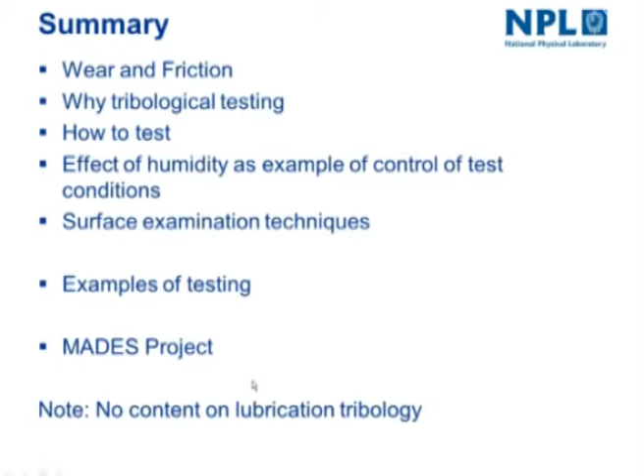Wear is a major and ubiquitous source of losses to commerce and society, and it affects most industrial sectors. I've just picked out a few: transport, mineral extraction, and manufacturing.

Friction needs to be controlled, but is not necessarily a bad thing. Indeed, wear is not necessarily a bad thing either. If you actually want to machine materials, then you want controlled wear. But friction in particular—if you didn't have brakes, if you didn't have good high friction soles on your feet, we'd all be in a bit of trouble.

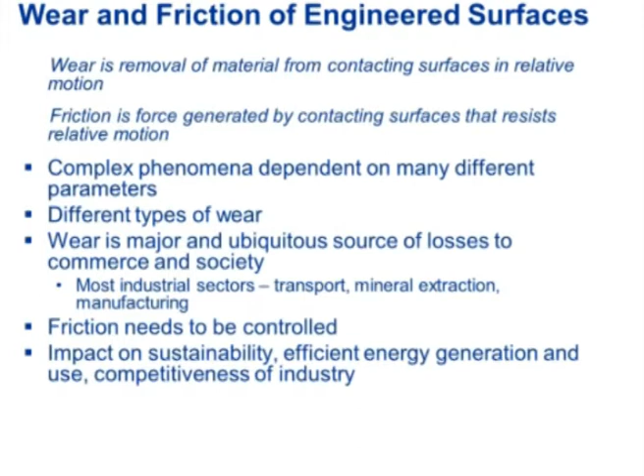Both friction and wear have impact on sustainability, efficient energy generation and use, and competitiveness of industry.

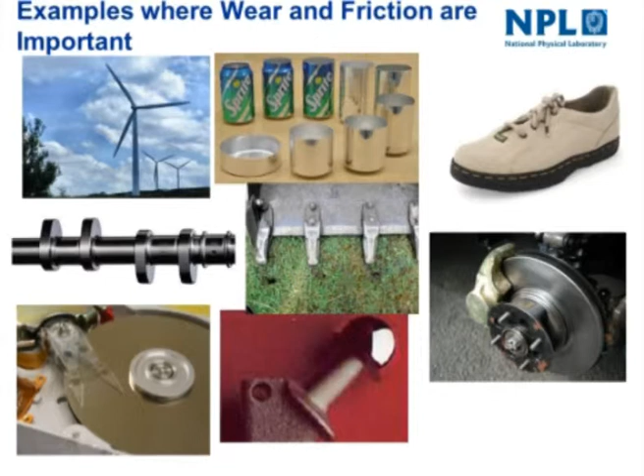Moving on, adhesive wear. This is where you get one nominally flat surface moving over another. One of the important things to realize is that even though you think it's flat, it's not really flat, and typically between two surfaces you get 4 or 5 different points that are carrying most of the load. At those points you can get phenomena like welding of the asperities together, and then you get removal of material and wear processes that take place.

Fretting comes from small oscillatory movement between relatively smooth surfaces, but the emphasis on this one is that it's small motion.

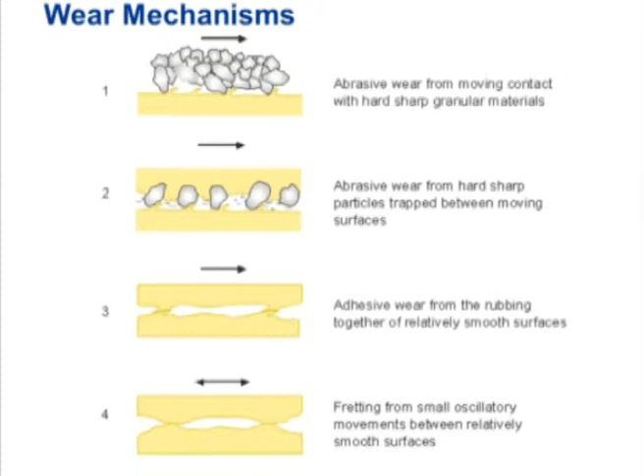Cavitation erosion is when you get collapse of vacuum vapor particles, bubbles in a fluid, and the stress waves that are generated through that cause damage to the materials that lie underneath. It can be quite severe actually—you would think that bubbles don't create much damage, but they can do. A typical well-known example of this is propeller blades for ships.

Particulate erosion is also critical, and this is where you get hard particles in the stream of fluid hitting a surface and causing damage to the surface.

I just wanted to go through those because one of the critical elements in carrying out wear testing, and even having a hope of generating good data, is to recognize the mechanisms that you have.

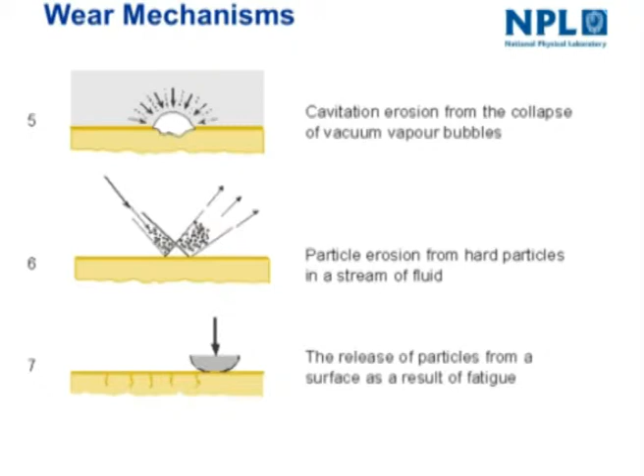So why do we want to carry out wear testing? There are several drivers here. One of the main ones is we want to reduce losses from wear. We want more efficient and more capable machines. We want more sustainable use of materials, and we want more competitive manufacturing.

You can go from that all the way through this sequence of examples to laboratory tests, and laboratory tests are much better controlled. They are cheaper normally, and they are less complex. But the big question is, do they really simulate what you want in the field? And that is a very big question.

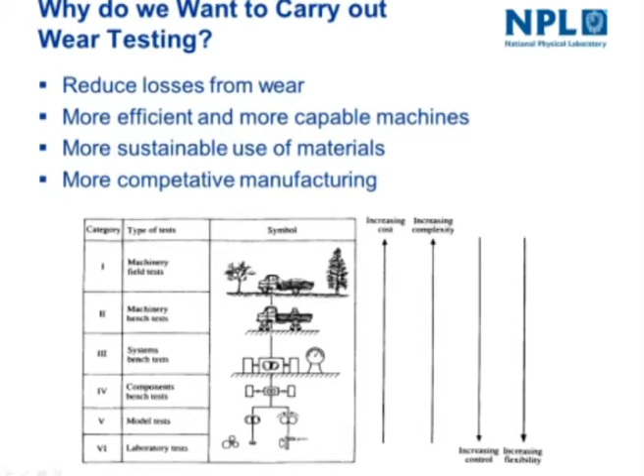Yes, I've asked one of those questions already. Before you carry out a test program to get good data from tribological testing, you need to answer two questions. What are the conditions in your application? Short form: what is the issue? And the second question is, how do you reproduce this to the required degree in the laboratory? Short form: what is the answer? You also need a good idea of how to analyze the results and use them in practice. Tribology is one of these areas where there's no replacement for expertise, whether that's your own or people you consult who have it.

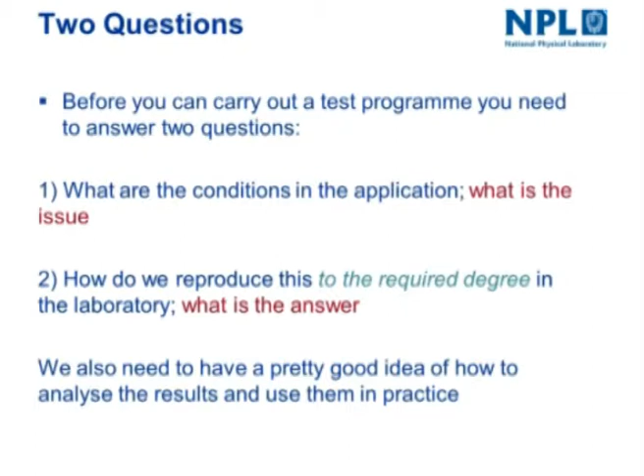So I posed another question on the previous slide: what is the required degree? There are several possible answers. The first is that you try to replicate every detail you can in the laboratory, so you know you'll get the right answer when testing. Some very large corporations and institutes do exactly this, and they get reasonable results. One downside is that the test systems they use tend to be rather expensive and complex to use.

The other approach, used by a large number of people, is to relax the conditions to achieve a simpler test. But this needs a lot of understanding about what's happening, so you know which test conditions you can relax and which you can't — and you can have some surprises here. One check is that you look at your results and confirm the major features of the wear are reproduced in the laboratory compared to the application.

It's very important to use the correct test for this, and there's a cautionary tale here. We did a survey about 15 years ago and found that about 70% of wear problems in industry — broadly speaking — are abrasion and erosion. It's surprising, then, that about 80% of wear testing published in the literature uses pin-on-disc testing. Even where you've got sliding wear, pin-on-disc testing is probably not the right approach. Reciprocating, back-and-forth motion is probably better than the unidirectional, always-in-the-same-direction motion you get with pin-on-disc testing.

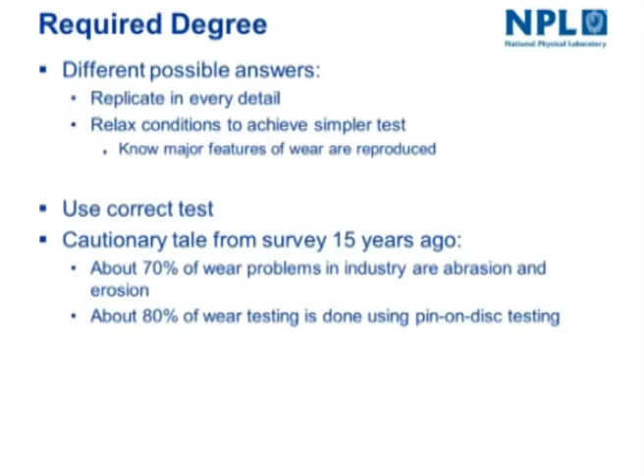So what are the factors in practical simulation of a wear test, a friction test? This is a little daunting, in fact, but you need to consider a lot of these aspects, and the list is actually longer than this.

The microstructure and materials need to be similar. The sample surfaces at the points of contact should have a similar shape to those in the application. The pattern of contact should be similar — intermittent or not. The contact pressure should be similar to that which occurs in practice. The pattern of movement and speed should be similar.

Debris is often generated and must interact with surfaces in the same way as in the application. This is something some people overlook from time to time, but it's absolutely crucial, because the debris can push surfaces apart, so you're not really looking at the contact of one surface with another.

Acceleration of the test is tempting, but you have to be very careful about doing this, and you need to preserve a mechanism similar to that in the application. It's tempting because a lot of applications where tribology matters are very long term — think of an internal combustion engine with a lifetime of 10 years or so. If you want to replicate wear like that, you can't really carry out a test for 10 years. So how do you deal with that?

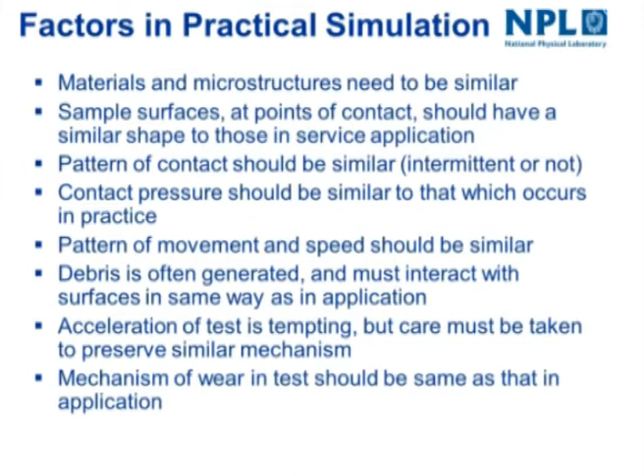The test variables that you apply are critical, and you have to use the right test variables. You have to adjust the right test variables, and make sure that you consider all of these very carefully.

So one of the things that is needed is to develop robust test procedures. It's my belief that you do need good standards for testing. We need to consider the test variables in the design of tests. Parameters include, but this is not a complete list: load, speed, materials, test environment, contact geometry. Humidity is a surprisingly important one, and the dynamics of the test system, or indeed the dynamics - I'm talking about things like inertial loading - are surprisingly important.

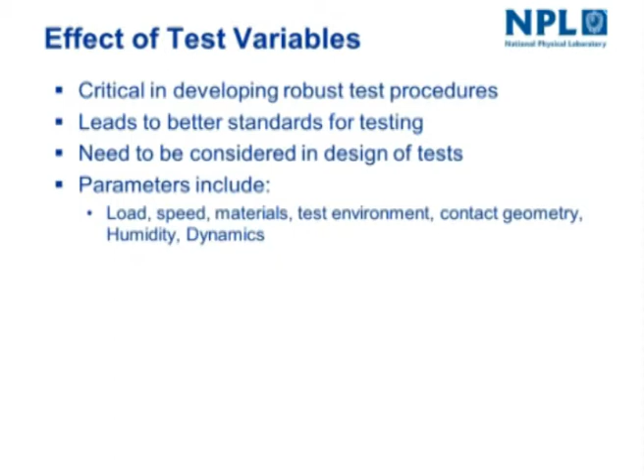An example of matching the application to the test is given here. This is a firm that was producing concrete tiles for roofs, and they used a tungsten carbide cobalt component called a slipper blade to actually form these tiles. The big problem they had was that they got a lot of abrasion from sand and other hard particles in the mortar mix that wore the component, and they wanted to improve the component lifetime.

So we did a program of testing. We realized it was a low stress set of conditions, conformal geometry. We looked at what's called the ASTM G65 rubber wheel test. We modified that somewhat - one of the main things we did was we changed the pH of the fluid that we used in that test. We also modified it so that you could carry out the test wet. For those that know, that's normally a dry test, but we had it wet.

If you look at the two micrographs, the top was a section from a component extracted from a real slipper blade, and the base image was a test sample. We reckon we got an almost exact match between the one and the other, and that gave us a lot of confidence that what we were doing was sensible. Talking to the firm, we found that we actually got quite a good correlation between our lab tests and field data, and that's also another check you can make sometimes, depending on your circumstance.

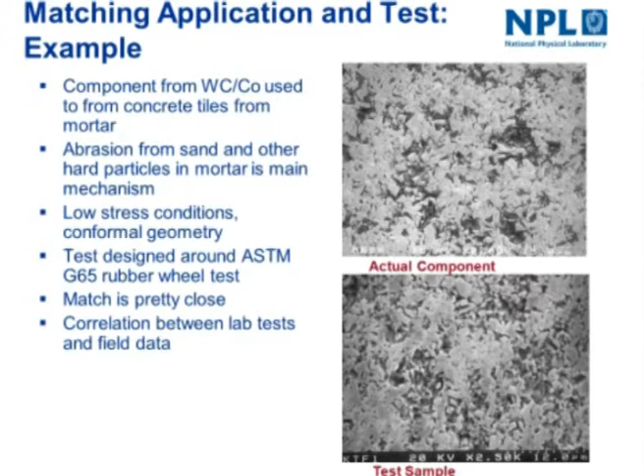An example of the effect of different test variables is humidity. I mentioned this, and it is quite surprising how big an effect you can have. This is alumina on alumina, with water vapor in the air, carried out in a pin and disc geometry, so you're rubbing a ball against a disc, and what we're measuring here is the wear scar that appears on the ball. There's a huge effect, in fact.

If you look at just the effect on the wear scar, that goes from about 1.5 millimeters up to nearly 4.5 millimeters, which doesn't seem quite as bad - that's only a few factors. But if you actually convert that to the volume of wear that takes place, there's a huge difference between 80% humidity, where the volume is 0.05 millimeters cubed, down to 3% humidity, where it's 4 millimeters cubed. So several orders of magnitude.

The reason for that is that at low humidity, as indicated here, the micrograph shows that you've got a lot of fracture going on, whereas at high humidity you've got this dark phase formed. We found that this was aluminium hydroxide, and it protects the surface. So a critical difference in the mechanism that you need to look at means that high humidity is much better in this situation.

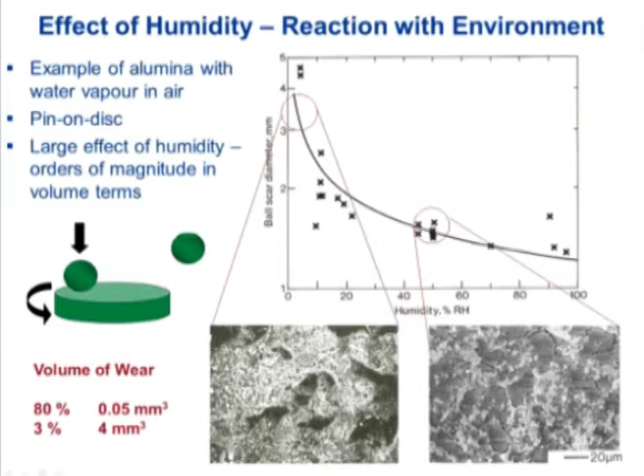You might say, oh, ceramics, we all know that there's an effect with water on ceramics, but this shows a bit more about the mechanism. It's wear debris that reacts with the water to form this softer phase that fills in the gaps in the hard surface, and you can see a micrograph. We've used adhesive tape to pull off the aluminium hydroxide here, and we've done some nano indentation that probes the properties of the two phases.

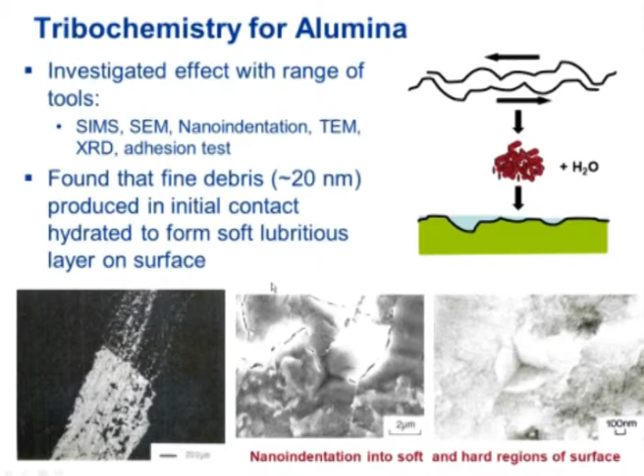This is a slide I was thinking was there, and it isn't just true for ceramics.

So here you also get an effect of silicon nitride on alumina, but with steel there you also get a big effect, and notice the huge effect for steel on steel. Also if you look at the literature for tests on brass, copper, and all sorts of other materials, you often get an effect of humidity, so that's something that's important to note.

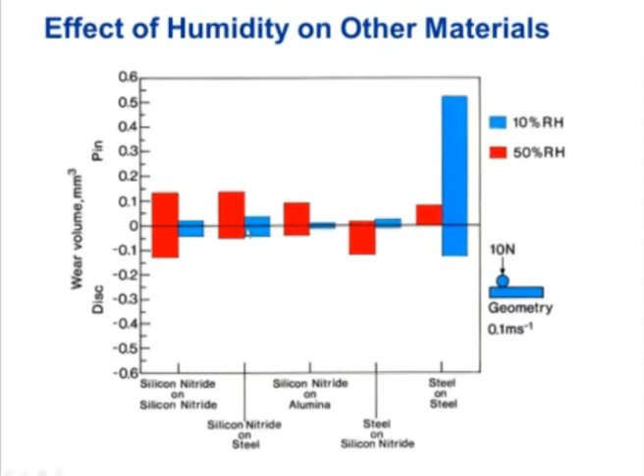There are a lot of standard tests around nowadays. About 15 years ago we did a survey of this, and we found about 400 standardized tests in the literature issued by the various standards bodies, and on tribological issues there are probably more now.

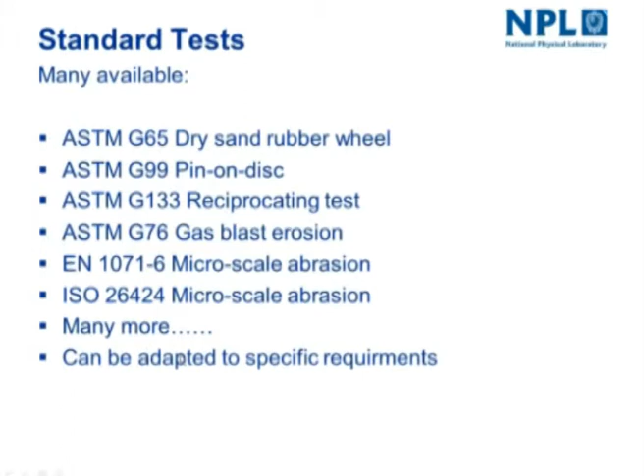I mentioned that one of the important things you really ought to do is use examination of the surface to check that the mechanisms you're getting are sensible and match up with your application. There's a huge range of techniques nowadays, and we're getting better and better at getting more information out about what's happened to surfaces. But the basic principle is that you use the simplest technique first and stop as soon as you've got the required information. Just looking at your surface is the simple thing everybody can do without any expensive kit, and it tells you a huge amount.

You can go through many other techniques: optical microscopy, and 3D optical microscopy is coming in nowadays and is very important—I've got a slide on that. Scanning electron microscopy, profilometry, surface analysis, TEM—but these are getting quite expensive, and you need to talk to people that have that sort of kit. We're fortunate here, being NPL, that we have a lot of that, so we're one of the people you can come to for that, of course.

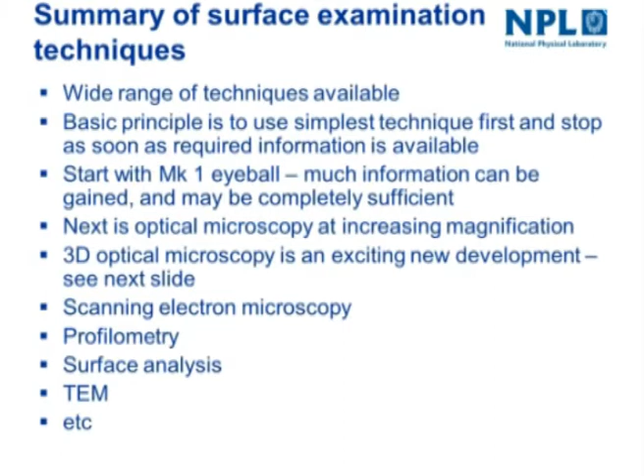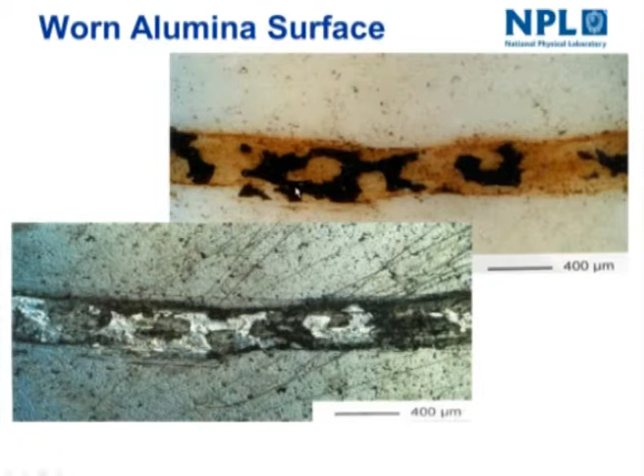An example of just optical microscopy is these two micrographs. This shows what's called the bright field micrograph—this is an alumina surface, by the way, and this is a transfer layer on the surface. You think this was rubbed with steel, and that the steel has transferred to the surface. We use cross polars here, on most optical microscopes, to show that in actual fact what you think is the steel transferred to the surface is actually iron oxide—you can now see the brown color that's been revealed. If you get the conditions right, you can see this is a dark shade of brown as well. So this is definitely iron oxide, and you've identified that very simply from optical microscopy.

This shows the slide I mentioned earlier—this is 3D optical microscopy, and here you can see the results of a test looking at the steel ball that we rubbed against a DLC coating. This is before the test, and this is after the test, and you can see the wear scar here. You can see there's a transfer layer, and some material that's built up on the surface. What you can do with these microscopes is look at height maps.

This is a height map before wear has taken place, and you can get a height map after wear has taken place, then subtract these two images. You can do something called image correlation, or data set correlation as I've called it, and subtract the two. The result in this case is this micrograph here, where the red is the true wear volume, which you can determine pretty accurately with this instrument, to a precision of about 10 nanometers.

That's the red, and the green is actually the built-up material around the edge. So this is higher than the original surface, and this is lower than the original surface, and you can see that in a profile taken on that line there. So this is the wear, and this is the built-up area on the surface. Using this sort of technique, we can get very accurate measurements of wear, and that's becoming increasingly useful.

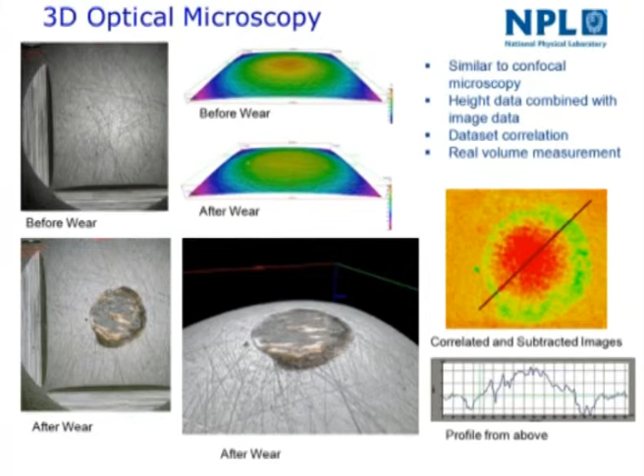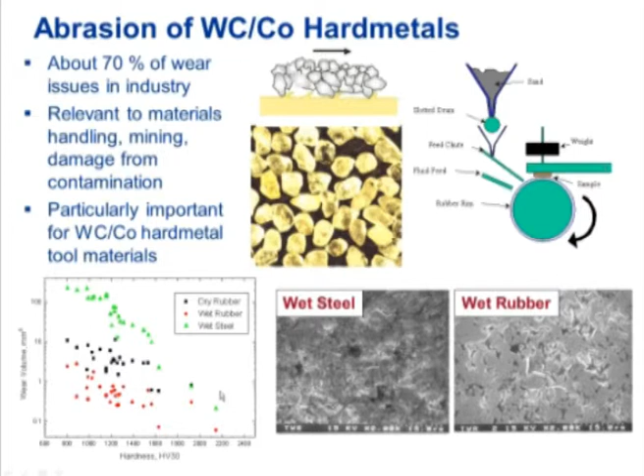So what we're doing here is trying to tie up the microstructural mechanisms with the magnitude of the wear that we get, which is always a useful thing to do.

I also wanted to mention we're doing some experiments with a tribology test system developed here at NPL. We carry out experiments on the laboratory bench, with the intention of doing them in situ in the SEM—we haven't got there yet. We're doing that for two reasons: one is that it's appropriate for MEMS devices, but mainly, from our point of view, so we can look at the fundamental response of materials in tribological contacts at the asperity level. We make arrays of tests with different loads, speeds, and numbers of repeat scratches, and measure friction and wear.

This shows an example of the progression of friction on experimental coatings—carbon phosphide coatings from Linköping University.

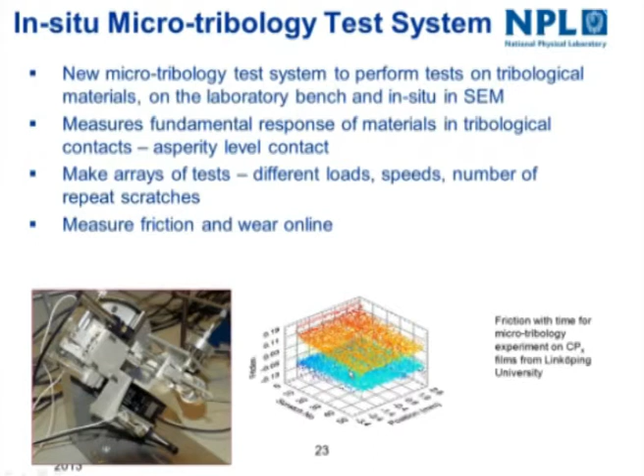One of the important things we do is look at the mechanisms of damage. Here we're doing a single point model experiment, traversing a 20 micron radius diamond stylus across the surface of tungsten carbide cobalt again. You can see the grains of carbide here, and the areas where there should be cobalt are etched away in this case. This is relevant, current work.

And not shown in this diagram, but you can also see a lot of evidence for plastic deformation in these carbide grains. The other thing we do is repeated scratching, so you could look at the build-up of damage with a progression of the test.

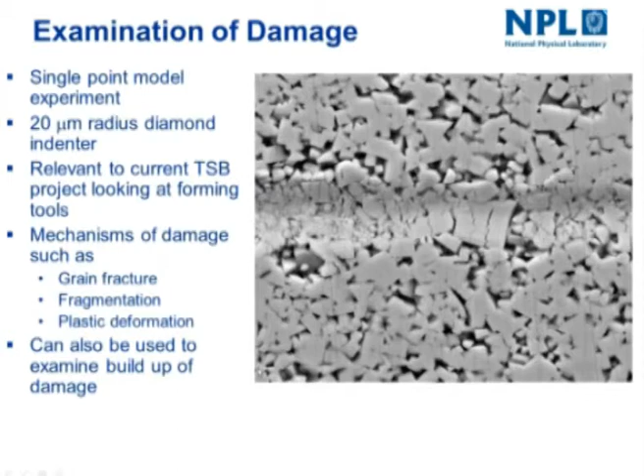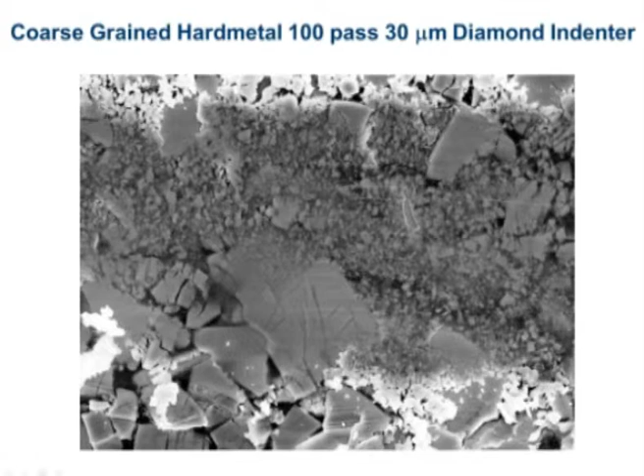If you look at the next slide, it's exactly the same area, and this is becoming an important area. So if I flick back to the other one, you can see there's been a lot more fragmentation of the surface, and in fact a layer of this composite material, a very fine scale structure, has built up. We think this is important in terms of protecting the rest of the surface. In fact, you can also see some very severe plastic deformation down there.

Finally, we have a relatively new tribometer now, which is a radically different design from most. Despite my remarks about pin and disc not being appropriate that often, we are using that here because we're trying to develop technologies that can look at the durability of surfaces.

The thing I'd like you to focus on here is this device - this is actually a line scan camera, and as the test disc rotates, every line produced by the camera contributes to building up an image. In actual fact, we could have one image of the wear surface that gives you a complete time history of the wear surface during a test. And that's the important thing - this is online, real-time examination of the wear surface.

It's not in situ, because that would mean looking through one of the test samples at the wear surface on the disc. But we're also developing techniques to do that, actually, using a sapphire probe.

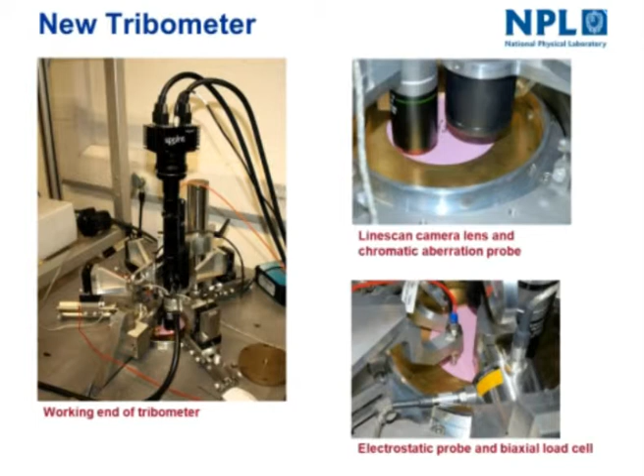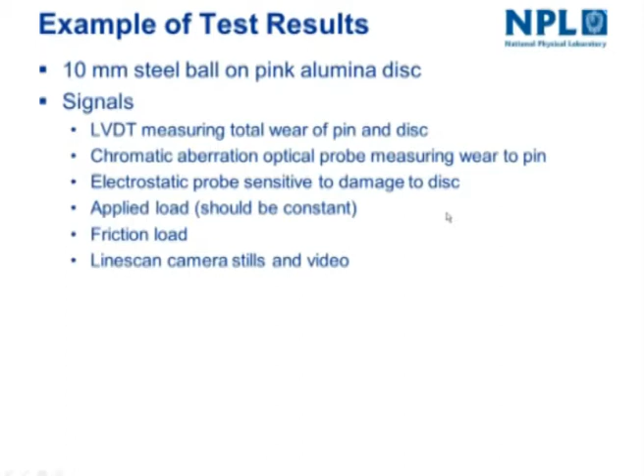So there's an example here of a test with a 10mm steel ball on a pink alumina disc. These are signals - we looked at LVDT to measure the total wear of pin and disc. We have something also called a chromatic aberration optical probe. These are very nice devices - they can run very fast, up to 100 kHz, and give you very accurate measurements of displacement. We've got an electrostatic probe, we're measuring applied load, friction load, and as I say, line scan camera, stills and video.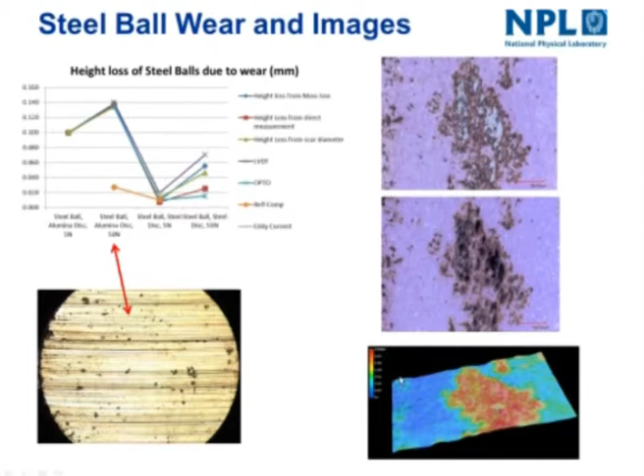And this shows some examples. We get build-up of material on the surface, as I've indicated earlier in this system. If you look here, you can see that's this rust material again, and it shows a 3D optical micrograph of that surface.

One of the advantages of this test system is the blue line here is the LVDT, which measures the displacement of the pin into the disc. The chromatic aberration measures just the displacement of the disc. So by subtracting those two, you can get, for the first time almost, an independent measure of the wear of the pin and the disc.

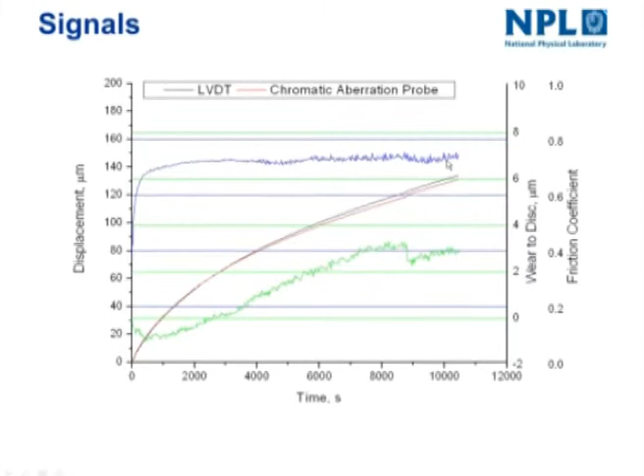This shows you the wear of the disc, in fact. You can see that in this test, initially you get damage - negative here is damage wear to the disc - and then you get an increase of the height of the disc as material builds up on the surface. The green line here is friction. A bit of a complicated diagram, sorry about that. The friction is about 0.4, which is typical for this sort of system.

And here we have a video produced from this line scan camera. I'll bring the mouse back so I can run this.

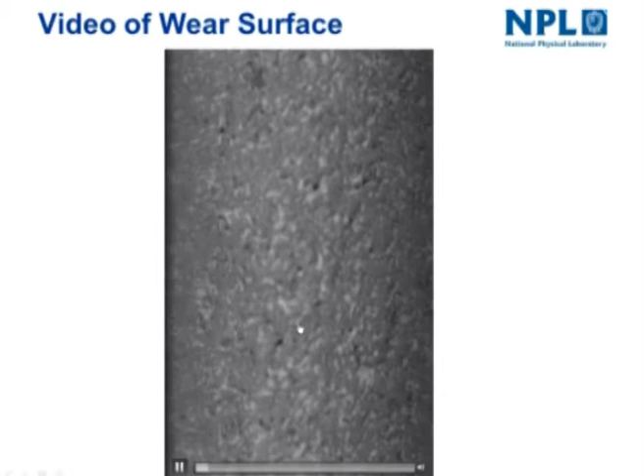So this is the surface of the alumina, and it goes in and out of focus. We need to refine the technology, but you can see that pits start appearing in the surface as it's damaged. Then these little black specks start appearing, which are adherent to the surface.

And then later on we get these grey areas, out of focus at the moment. It'll come back into focus in a moment. Here we are - build up on the surface, and then the remainder of this is the progression of these grey areas as we build up these transferred layers of iron oxide from the steel ball to the surface.

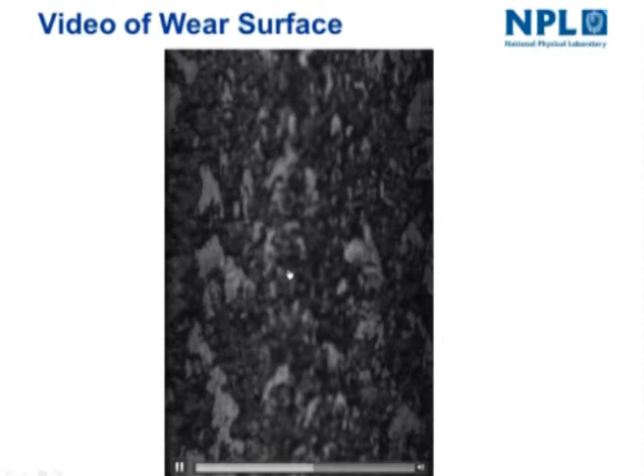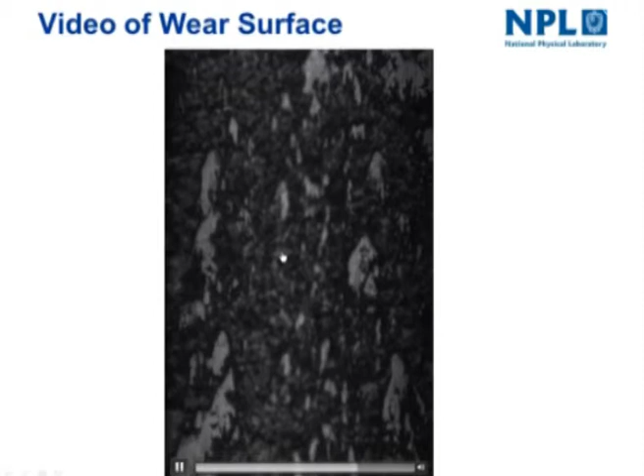And the importance of this is that for almost the first time, this enables us to see what is happening on the wear interface as it is happening, and that's tremendously important. I'm going to move on from that - it doesn't change that much for the rest of that video.

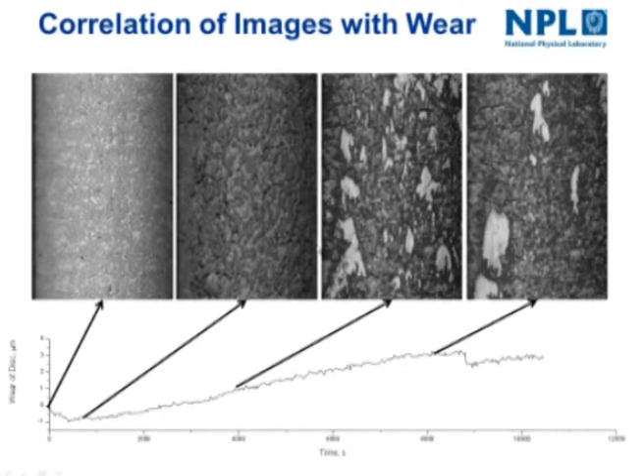But this just summarizes those results. So a still image from the start shows the original surface. Here we produce some pits in the surface - this is the low point of the wear to the disc. Here we're beginning to build up these layers which push the surfaces apart, and then this is towards the end of the test. This step here isn't significant, it's just an artifact in the measurement, but I hope you can see the power of that technique.

And I will pause there and take further questions if you have some.

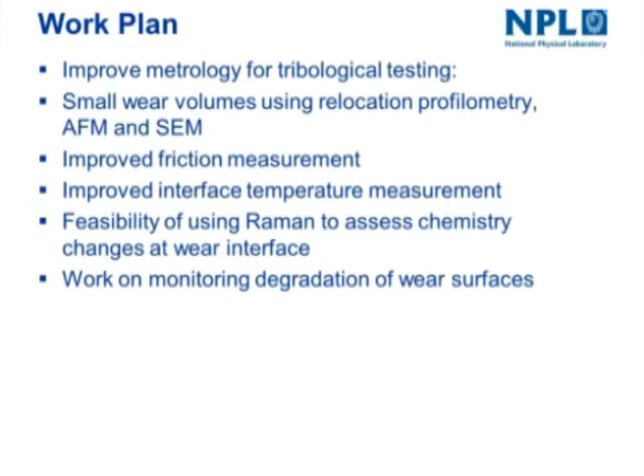So examples of what we've done here: we've now developed a self-zeroing friction measurement system for low friction materials. Drift of friction measurement is an issue that we're hopefully getting over. We're measuring temperatures at wear surfaces directly using sapphire probes, and as I said, relocation profilometry for the measurement of small wear volumes.

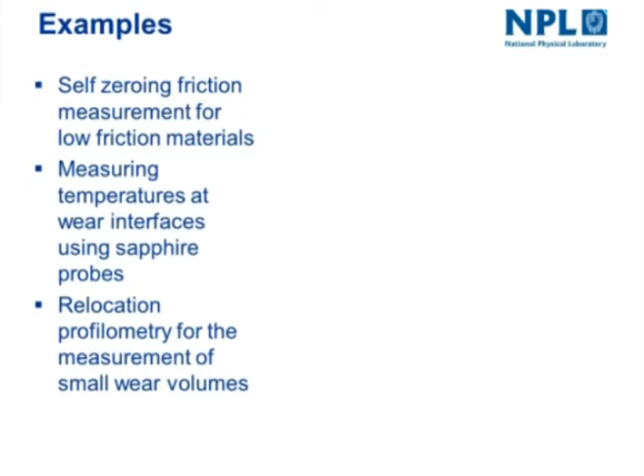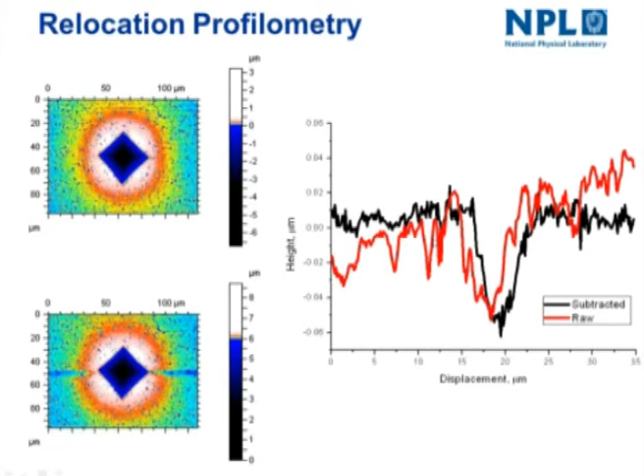Two examples of the work: relocation profilometry. Here we put an indent into a surface - you can see the Vickers indentation and the uplift around that, before a tribological test. Here we put a scratch through that, and we subtract the initial before-image height information from the after height information. The profiles taken vertically across this end of the wear scar show a substantial improvement in the quality of the data for the subtracted information compared to the raw information, making this measurement, in theory, much more accurate than the red one here. We've yet to quantify the uncertainty in that, but it's looking quite promising.

Secondly, this is actual temperature measurement of the wear interface as a test is carried out. The spot there is the contact zone, looking through a sapphire window at the contact interface, and here you can see the temperature profile as we step the load up in 10 Newton increments, up to a maximum of about 50 newtons at the top here.

So we're now generating an average temperature in about a millimeter spot in this experiment of 66 degrees. The next step here is to enable us to focus on the actual spot, so that we can have a look at the actual asperity level interaction between the two surfaces.

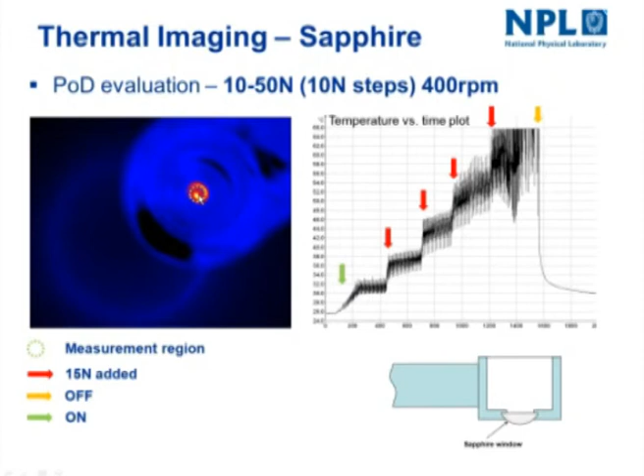So this is still work in progress, but it is already yielding some significant information, because estimating the flash temperature or the contact temperature is very difficult in this sort of condition. So that's it.

Just to summarize the whole presentation, not just that element, friction and wear are very complex. You have to keep testing relevant to the application. It's very important, in my view, to match the mechanisms and applications in the application and your testing, and to develop understanding of the mechanisms of wear, which helps feed back into development of better materials and better design.